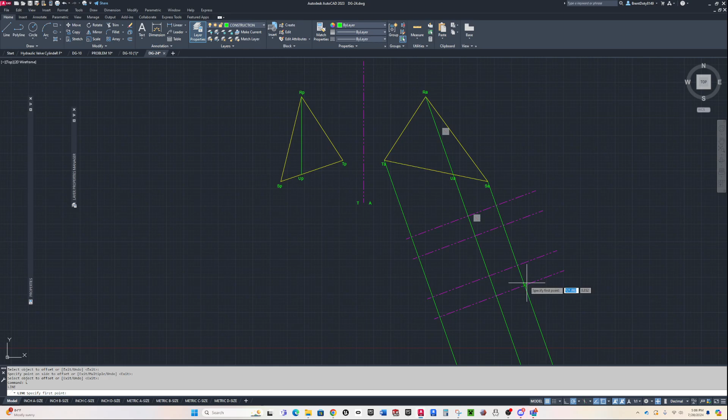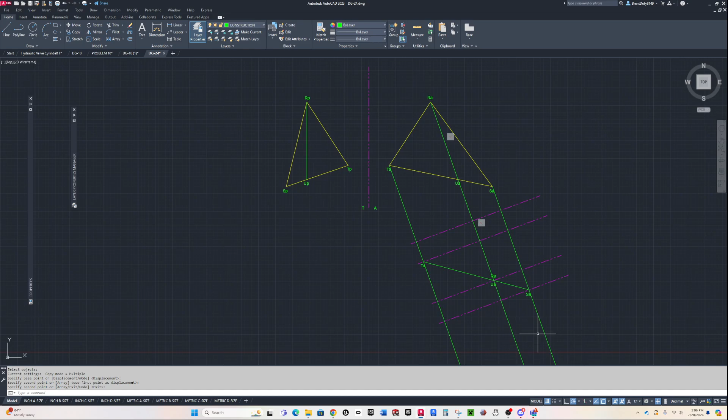So it goes from S, which is the furthest one out here, down to T. So I need to draw a line from here down to T. And if I did it right, it goes through point UA, which is right there. So I'm going to copy. All right. And I'm going to put a little circle right here for this point so that I have that point, because what I'm going to do now is get rid of my fold lines because I don't really need it.

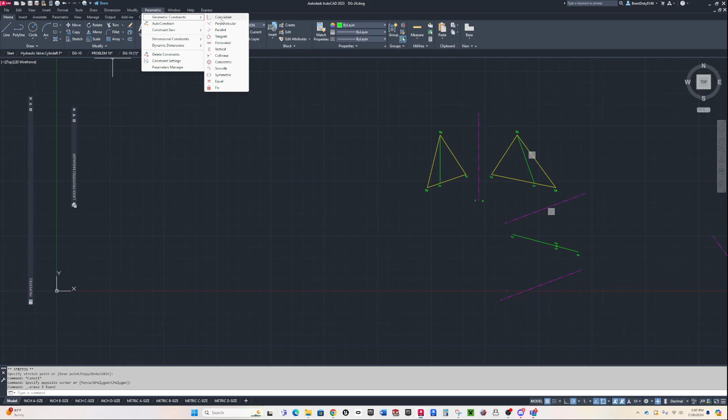Okay, now this fold line, I'm going to move it down here, and let's get rid of our projectors that we don't need anymore. All right, so here is the edge view of our plane. So now we go parallel with this guy, and then measure over here, and that'll give us true shape and size. So we're going to come up here to parametric, geometric constraints, parallel, and I need this and this to be parallel. And then we'll scoot him up a little closer, like so.

Okay, now we're going to do our ray. You can use X-line if you want, but I like Ray better. Ray's just a much better feller. And then I'm just going to copy this one over to here. All right, so I've got my points. Remember, the one that you project off of, you go back and measure off of the next one back. So wherever you're looking for, it's always 2 back from it, or it's the view right behind the one that you're projecting off of.

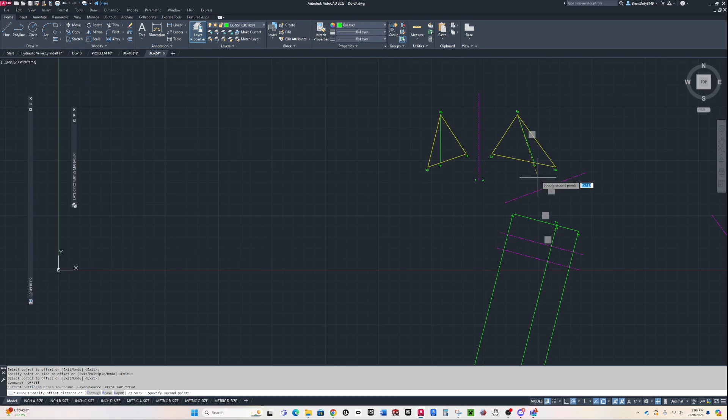All right, so we need to go to offset. And this time, we're going to use these measurements. And I'm just going to do the R guy because I only need 3 points. So S is the closest one. So I know this is S, right? So S is right here. And then R is the furthest one out. So R would be right there.

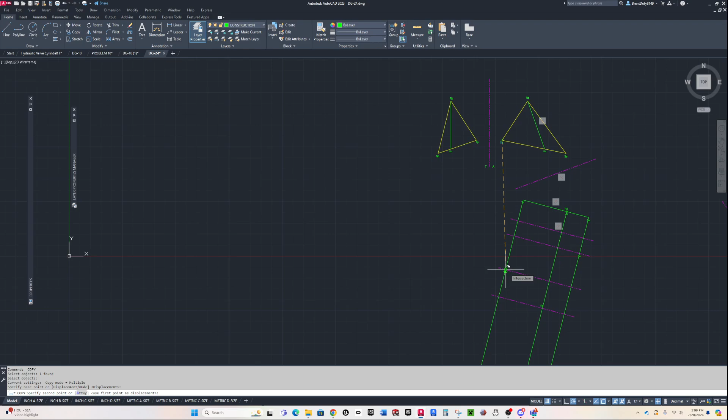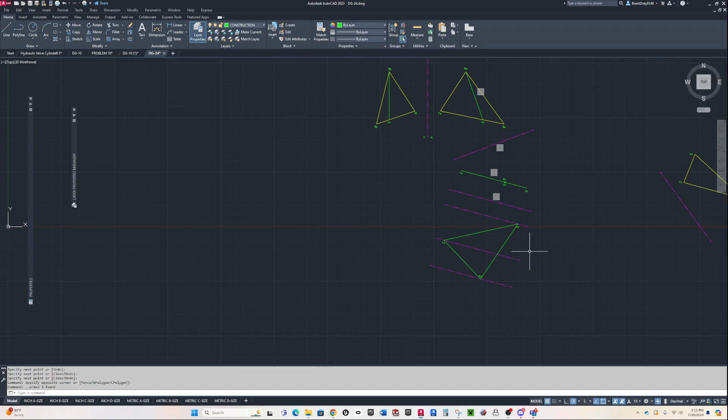And then T is going to be the one in the middle. So if we were to draw our line, it would go from here, T to R to S back to T, right? So there's T to S, and then T to R, and then S to R. So there is true shape and size of our plane, like so. And hopefully this helps you out and you'll be able to draw this one on your own.

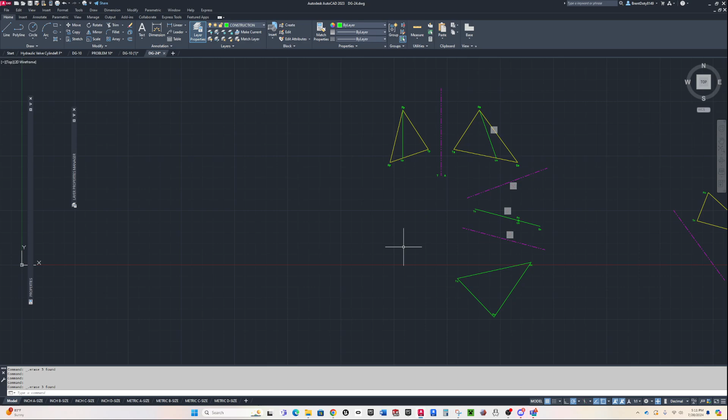So let's just do a little review. You have to have a true length line first. Then you have to find the point view, which is your edge view. And then once you have your edge view, you can go parallel, and that gives you your true shape and size. Not too bad. Okay, so hopefully this helps you out. Remember, on this one, you've got to draw a line. That makes your true length line, and you're good to go.